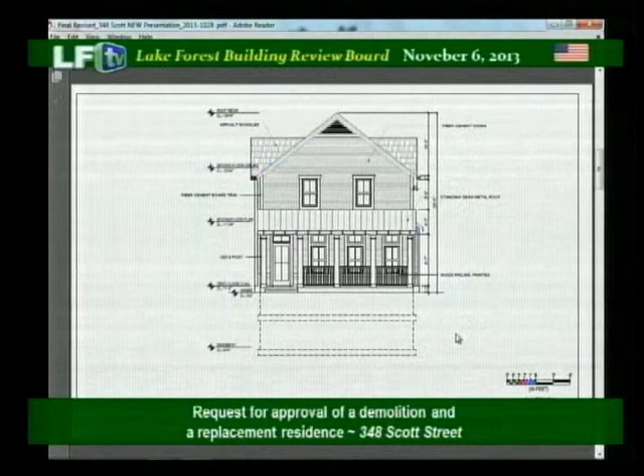Let me move on to the elevations. This is the original elevation you saw, and you can see the side lights and thinner columns. Here you see we went to a 10 by 10 post size; it was 6 by 6 in the original. We eliminated the side lights and kept an even cadence to the windows across the front, which the door continues now.

On the side elevations, this is the west. This is the original—we had a couple of high windows there and a small porch off the back. What we did was continue the window line across, continuing the feel across the side of the building. That's the driveway side, the west. We cleaned it all up using the same windows, nothing new.

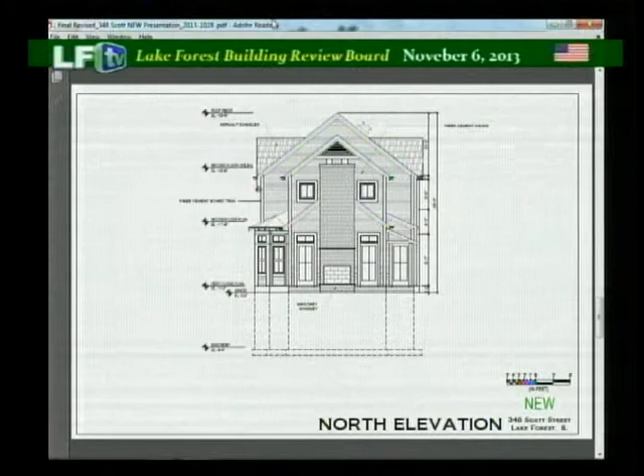The north elevation was the biggest issue at the last meeting. We had virtually no windows there. Here you can see we've added doors out the back, with windows up above. So your access to the back area is now from the north elevation, not out the side. We eliminated the porch on the east side. You can see here was the east—we had the porch and the sliders.

Now we have high windows because there was a comment about the motor court next door and lights flashing through the windows. So now we have high windows, and we continued the same high window that we had in the kitchen across. We eliminated one of the transoms in the kitchen so it wasn't interfering with the eave.

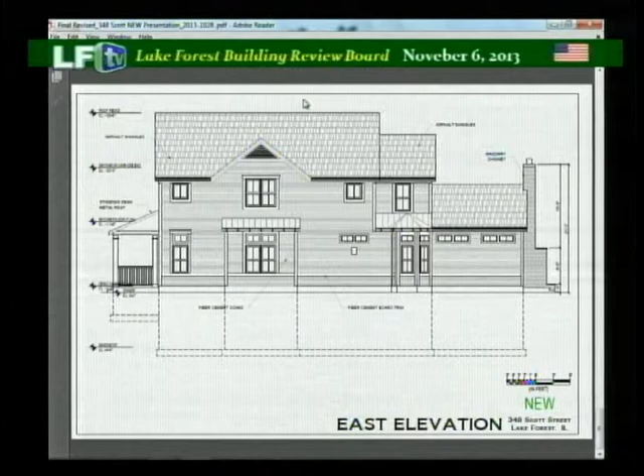One element we're showing now is the open eave—you can see it across all the lower eaves. So we have open eaves now on all the metal roofs at the bottom. That's the sum total of what we did to revise the elevations. Great, thank you very much.

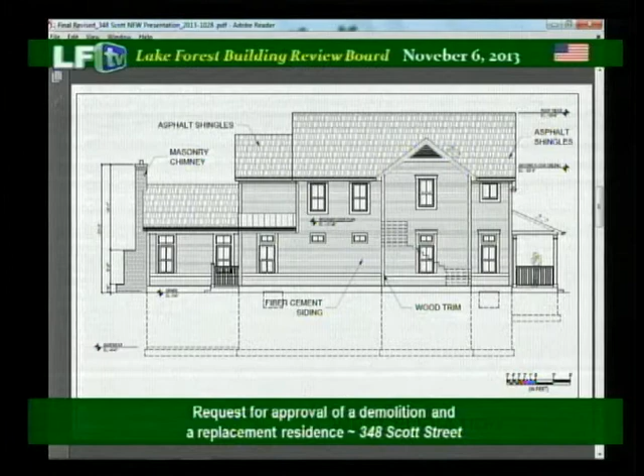Okay, and then what is the material in on the front porch and the side gable? That's open construction, because we have exposed beadboard up between the rafters. So the ends of the gables are open. Right, yes, okay, that's open.

The garage, the double hung window that you're showing, the light divisions are inconsistent with the main house. I don't think I have a picture up here, but yeah, those will be the same.

And what's the material of the garage door? The garage door will be a painted steel, and it has no light. Is it just horizontal panels? We're showing it with no detailing at all, we were just gonna keep it a flat panel. I didn't think that a raised panel would look good in this case.

And the door, the man door to the garage, is also just a flush door? Well, it'll be a solid door, but I think we could do a style door if you thought that would be more appropriate.

Okay, and what is the exposure of the siding? We were thinking probably an 8-inch lap, Hardie board. Okay, but that's something that is not, I mean, if it's gonna be 8-inch presented here, it should be 8-inch when it goes into permit, right? If we're gonna approve it, yes.

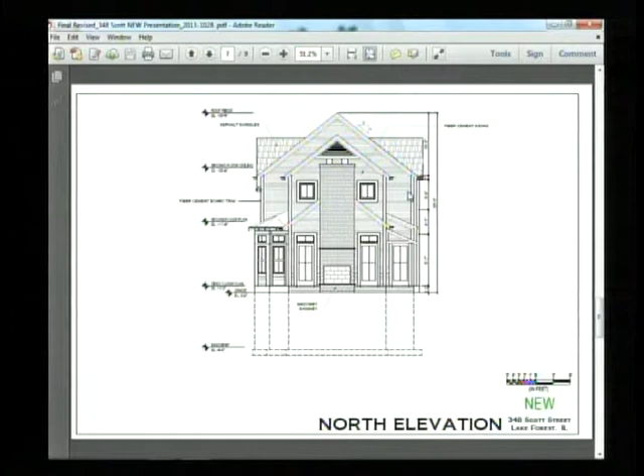Particularly when you look at the existing building in the submittal, which has 8 inch, and the close-up views - it's hard to see from there. I'm just intrigued with whether the finer scale siding might in fact be more attractive for this building.

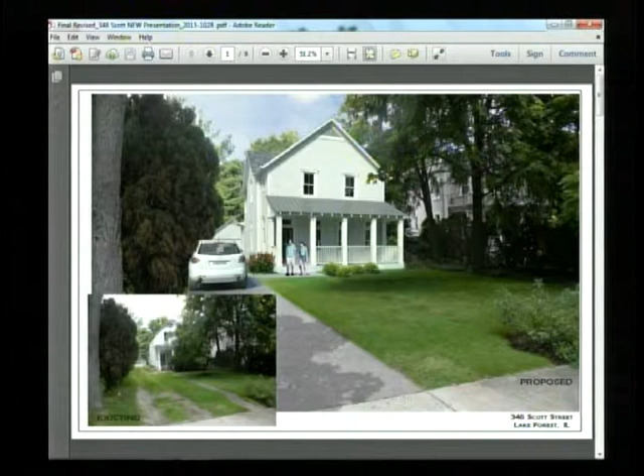I think it's open to discussion, certainly. We thought a broader exposure would create less busyness, because the farmhouse being a very simple design, there's not a lot of ornamentation, so we didn't want to create busyness with the siding. But I don't think it'd be wrong if there's a 4-inch exposure.

Well, it seems to me the building is small, looking at the existing house and their relationship - it's a much rougher scale, almost crude, the existing house. But for the smaller dimension, it seems to me it would be more appropriate to a small scale.

Well, we can certainly do that. The siding can be whatever we want at this point, exposure-wise. They do have standard sizes when you purchase it, but we can certainly take a look at that and work with staff on the exposure. I think it'd be worth investigating. Okay, absolutely.

Do you have a streetscape? I don't have it on this one. I think we submitted it to you. It's not in the package. You don't have one? It would really be nice to see this building's relationship to the neighboring buildings - that's usually part of the submittal. We had that in the last one, but unfortunately we didn't put that up on this one. It's basically the same size - all the houses are about the same, they're all about 30 feet tall on the block there.

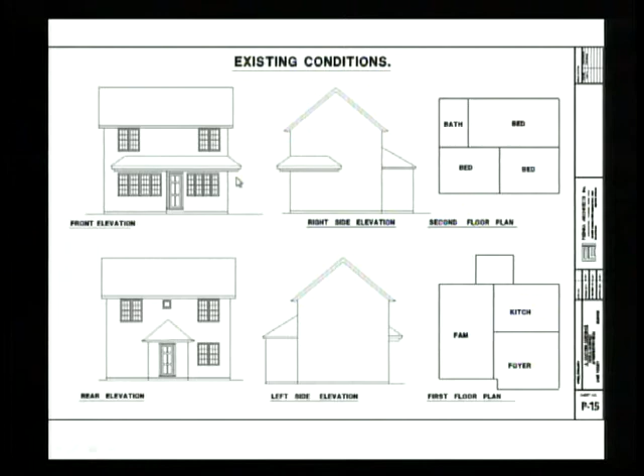This is kind of a general overall look of the house. We put this together just to have a feel for what we're taking down, and we want to give it a little credence when we replace it. So we're duplicating some of the eave detailing you'll see on the existing house, as well as what you'll see in some of the overlays. We're actually tying in this existing porch eyebrow roof into our new porch detail as well.

Before we made the realization that we were going to go forward with a new structure, we did look at what would happen if we tried to add something onto the back of it. Again, you can see the house is over the front yard setback, and the current garage is over the setback in the back as well. These two trees were really creating a limiting issue for us.

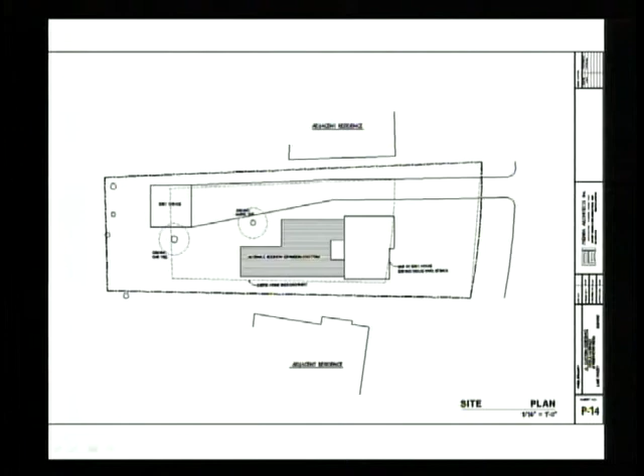We've since had these trees looked at by the arborist, and this one has some very bad disease and is deemed to be taken down. And this oak in the back, as you saw from that picture, is kind of leaning into the garage, so that one as well is going to be an issue.

This here is an overlay showing our proposed footprint as well as where the existing garage is. When we came in here, just to give you a general overall on the site, we were trying to come in with a project that actually pulled further away from the street, so it wasn't quite out in front of these adjacent properties anymore.

It's going to be back a little bit, and you're going to have a transitional porch that buffers you from the street and the house. In the end, we wanted to make sure we didn't get too far back with it either. As you saw in my other design with the potential addition expansion, we were going to be much further into the backyard, and I felt it was important to keep those views, not only for this project, but for the neighbors as well, just to keep that open.

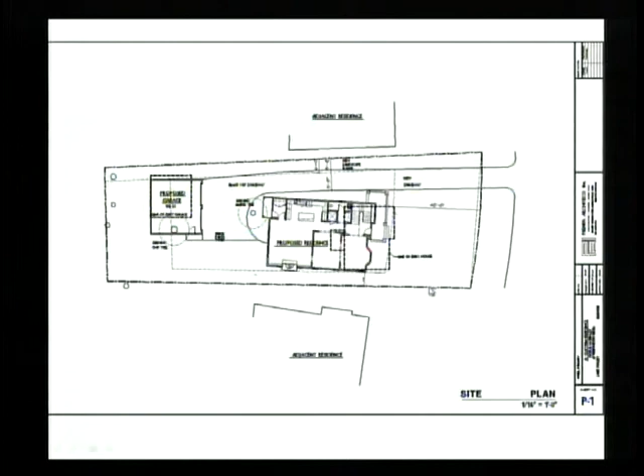This is the general site engineering that's in your plan. It looks like everything's in concert.

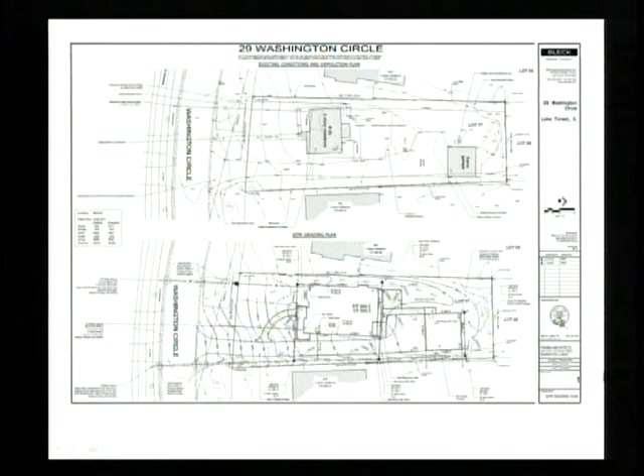I know, Mike, you're saying you can't comment on this now, but basically the water is being diverted in swales along both sides of the property. We're basically maintaining the grades that are there. I actually think we're solving some issues. There were some low-lying areas in the back of the property where water collected and created issues, and I think now we're deviating from that and getting a lot of that water out of the area.

As far as how this is going to blend in with the surrounding landscaping, it's basically similar to what's there, only being dressed up with a much nicer arrangement of plant life.

We're going to maintain a buffer. We've kept the house narrow enough so that we could have a landscape buffer as well as a driveway and another landscape buffer up to the house. Quite often you'll see these houses where the driveway is all the way up to the house, so we're trying to maintain that so we can have a gradual transition from house to landscaping.

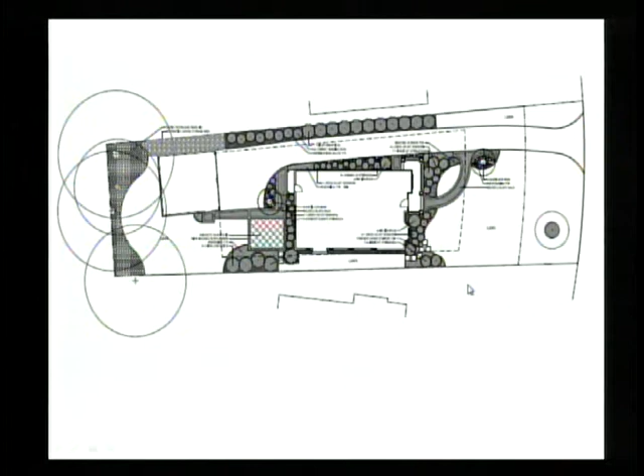In terms of its surroundings, as you know, it's in a very eclectic neighborhood. There's a lot of farm-style houses. Some are a little more stylized than others, and some of ours are very traditional.

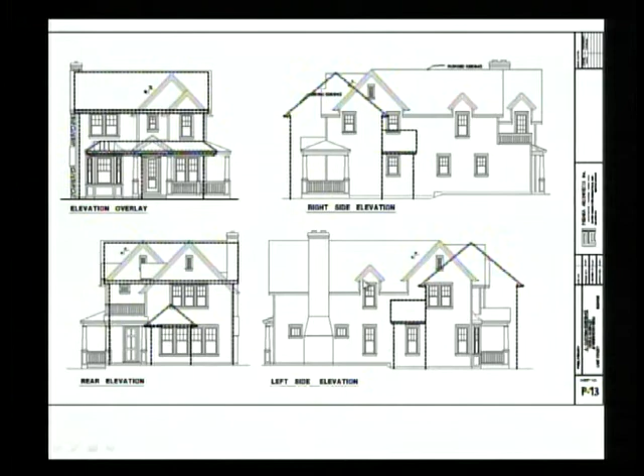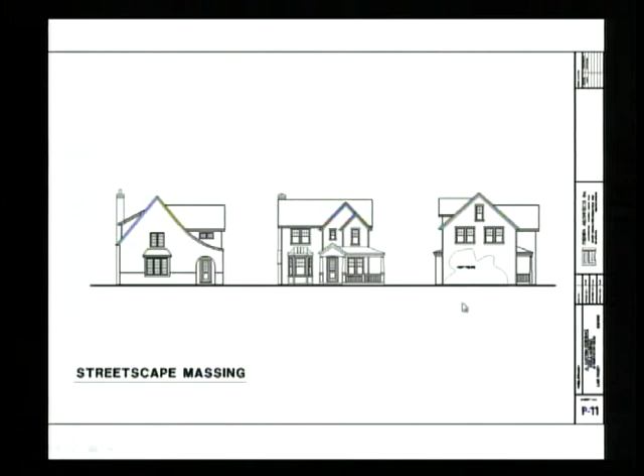This is kind of a street massing of what we're talking about: the house to the west, house to the east, and here we are in the middle. We were trying to continue - there's a strong, in my opinion, gable front facing and then gable going left to right on both of these houses. What we did is try to continue the same thing, so your eye marches its way down the streetscape as you're moving along, and then soften the front with the porch element. That's kind of where we got to with our design.

I can talk a bit about the detailing on the house. It's going to be 5-inch Hardie board siding with a 5-inch exposure. We're going to do 5-inch corner boards with the MiraTEC, which you have in front of you there - I can hand it to you, you can take a look at it, but it has two faces to it. One side's a smooth face and one side's a grainy face, and we're going to go with the smooth side, just because I think it has a better replication of what the actual wood would be if you used cedar.

That MiraTEC will also be used for the detailing around the windows. The deck railing and posts are going to be a material called AZEK, which is that railing configuration you're seeing there, comprised of a traditional, not too overdone, detailed porch railing. The pilasters will all be done out of the MiraTEC material as well, in a traditional fashion, as well as the beam and lintel and capital details.

Do you want me to hurry up? Yeah, if you could, just keep moving along. Okay.

The roof will be cedar shake, copper roof here, a very unstylized front door, much more of a traditional look with a very traditional, simplistic surround run around the house, with a stone chimney off in the back there. True divided or simulated true divided lights with bars on the interior and exterior as well.

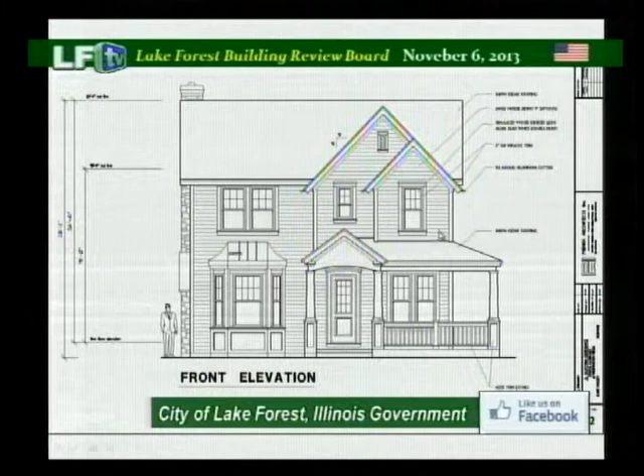These are kind of the architectural details. We're going to go with half-round aluminum gutters to try to mimic the traditional detailing. The eaves, again, will kind of replicate what's on the existing house, as well as what traditionally should be done.

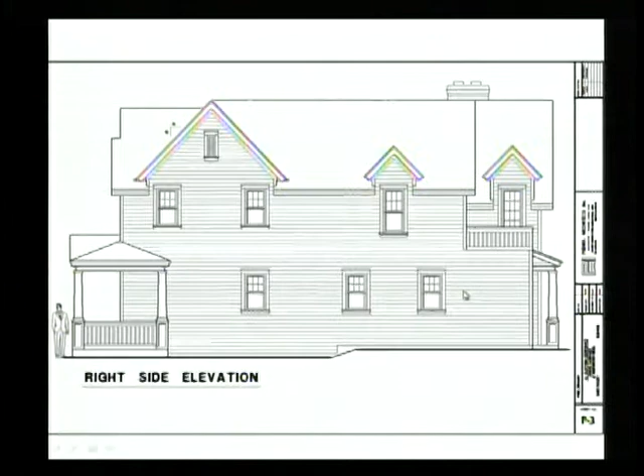On the right side, which is the east side, we have the window fenestration that you can take a look at in your plan to see what they all are, but we try to make sure everything had rhythm to it and lined up and made sense as you work your way across the elevation, as well as the back, just trying to give it some good balance and have it make sense and not look like the back of a house necessarily, as well as the west elevation.

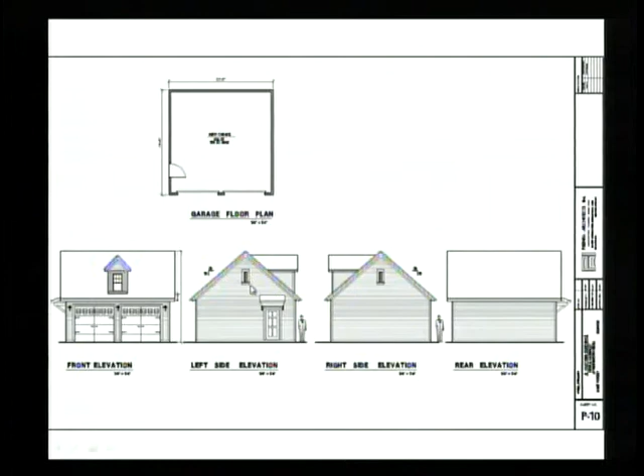This is a quick depiction of the back area, the garage that we're talking about doing. All the detailing basically would be the same. We're thinking about doing a little shed roof over the side entrance to the garage to give yourself a little cover, since it is a detached garage that we're talking about.

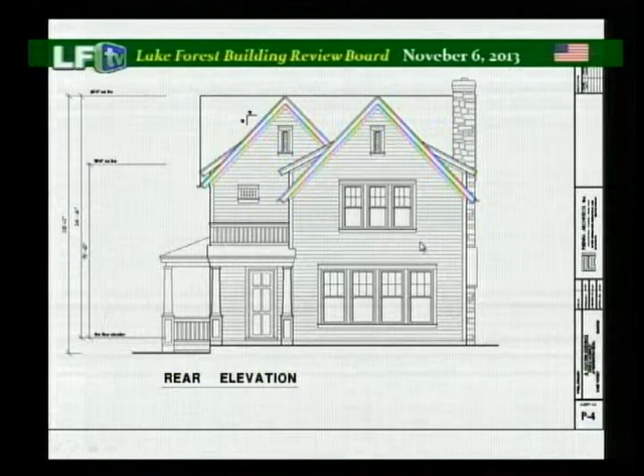There was some inference in the staff report to take a look at doing the side dormers as shed dormers, just to try to help simplify the building a little bit. So I kind of did a quick rendering of that to show you what that might look like. It does some things, but others I think it actually, in some ways, it may complicate it a little bit further than what it currently is.

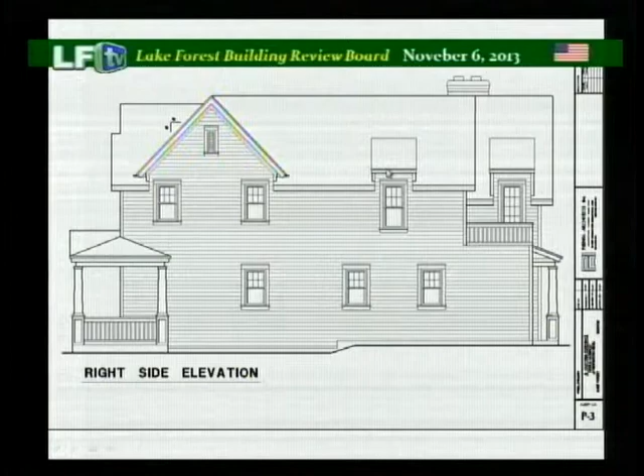I think the versions that you saw before where we had the gable dormers, they actually kind of blend a little and call less attention to themselves. So maybe that is or isn't the answer, but we thought we'd take a look at that.

With that, I do have Norm McKinley, the owner, with me. I have Adam Lubrick from the builder that's going to be doing the project. So if you have any questions pertaining to them, I believe Norm wants to say a few words to you. I don't know if you would like her to do that now or if you would like to wait.

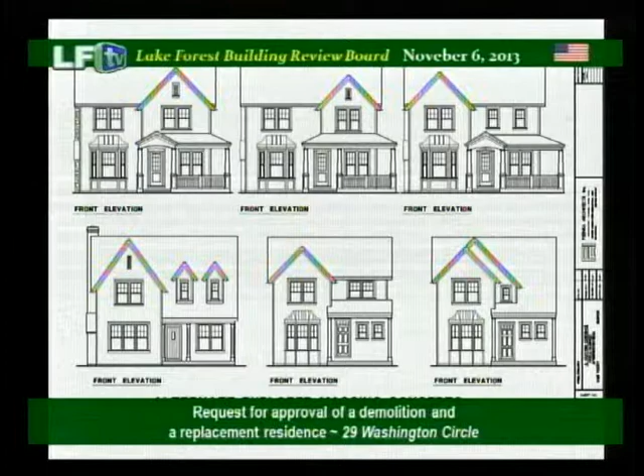Agreed, the top left, and then the bay window again, maybe a little simplification there. I wouldn't choose to direct them in any of those in particular; I'd just leave it up to them to come back with what they feel is their best presentation next time, knowing our guidelines. Do we have a motion here?

Based on the issues we're talking about, which are all valid concerns, we're really only talking about four or five things here. Does it make sense to form a subcommittee to try to resolve this? We were just talking about subcommittees and their roles, and found it more advantageous to both petitioner and all parties to bring it back to full board approval when there are this many options before us. That's the tool we found to work better, in an effort to expedite. Understood.

The entire reason for the bay is my baby grand piano. There's no other place for it in the house, so that's why the bay is there. In fact, it's tighter than the bay I currently have my baby grand in.